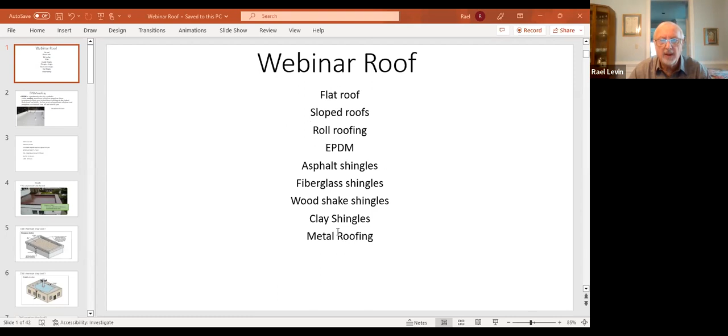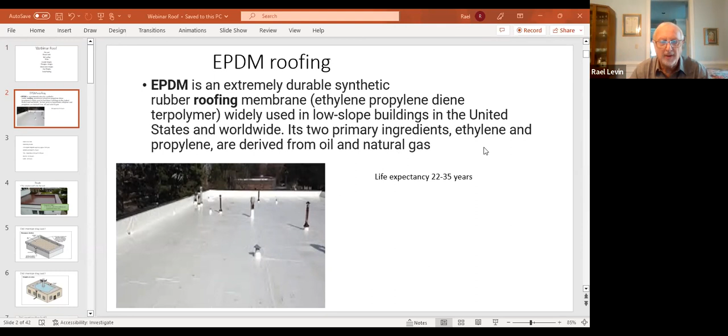EPDM. Its fancy name is ethylene propylene diene monomer. It's used on low slope buildings in the United States and worldwide, more of a commercial application, and it's made out of oil and natural gas. So we need that as well.

EPDM lasts for about 22 to 35 years. Roll roofing, which is probably the cheapest type of roofing, has a 10-year life expectancy. Our standard 3-tab asphalt shingle, about 10 to 15 years. And then, of course, we have architectural shingles that have a little better look to them, a little thicker shingle, life expectancy 15 to 20 years. Slate, all different types of slate, depending on the thickness, 75 to 200 years. Clay tile at about 50 to 100, and metal roofs 40 to 70 years.

I used to love to see 'building off the grid' videos where folks build these homes with little sloped roofs up in Alaska, Colorado, all the really cold areas that get a lot of snow. Metal roofs work really well there. The issue is that with slate, clay, or metal, we can't really get onto those roofs to crawl or walk around on them without special equipment. The same goes really for wood shake shingle roofs as well.

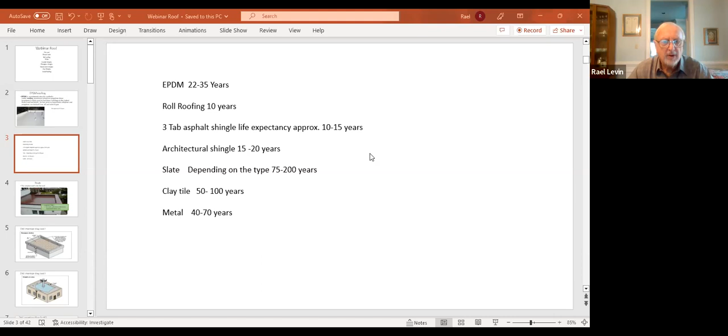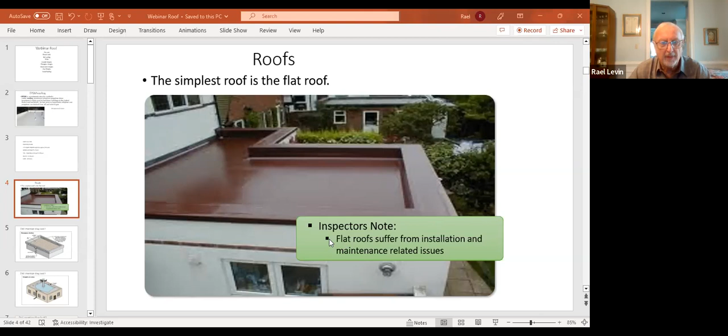So what I'm talking about are the scupper drains. We see the flat roof here, it's got a little bit of a slope to it, and it's got gravel on top. The whole idea is we got to let the gravel slope toward the scuppers and toward the parapet wall, and the water runs out there down to the ground level. The biggest enemy of any roof at all is going to be water, and of course we get rain, so water is an issue. So what we need to do is make sure we always keep our roofs clean and free of debris, free of leaves, etc., in order for everything to function the way it should.

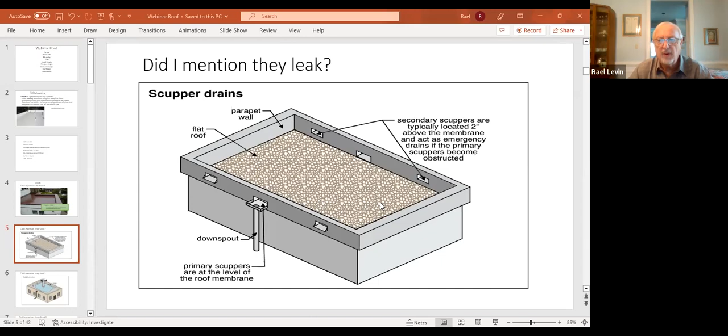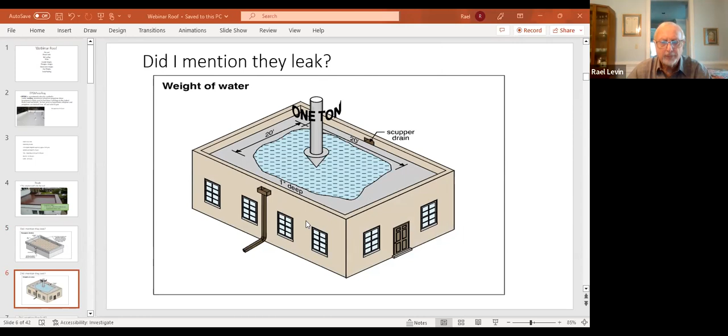So let's look at this flat roof right here, a 20-foot by 20-foot roof area. I'm just going to switch up here to the bigger picture. Okay, so we're looking at 20 feet by 20 feet, a 400 square foot building here. When we get rain on it and there's no way for the rain to drain off, you're dealing with 1 inch deep of water sitting on that roof, and there's 1 ton of weight sitting on that structure.

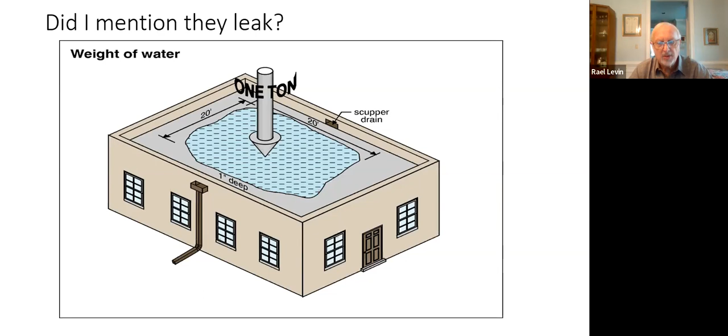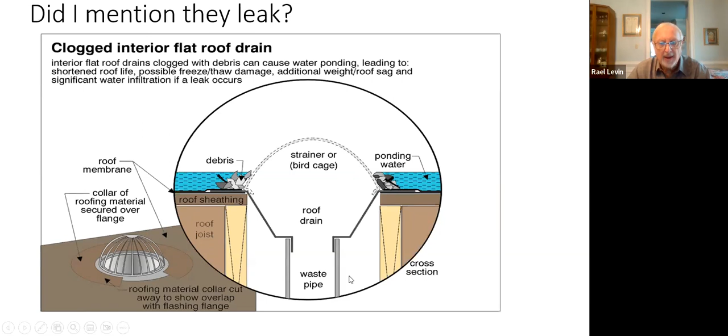What actually happens is when that weight sits on the structure like that, it causes the structure underneath to sag. So how do we handle that? Well, you can see here how debris, leaves, or trash could actually be up on that roof, and we call it ponding when the water just sits there. You see there's a bird cage strainer right here, and it has to be kept clear so the water can run into that drain and away. Then we see here what actually happens is that sag, due to the weight on that roof, causes that sag in the structure. To think about what we're going to do here to alleviate this, well, there would be 2 ways to improve the flow of water off of that roof.

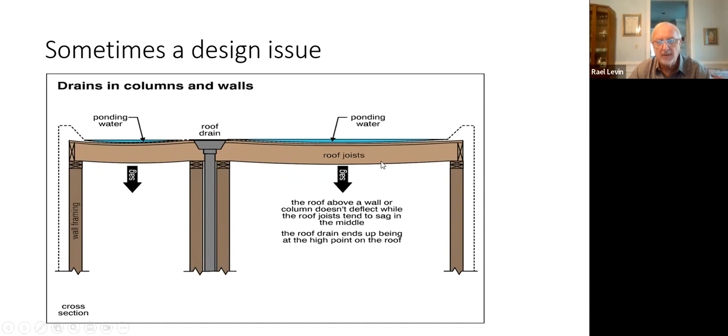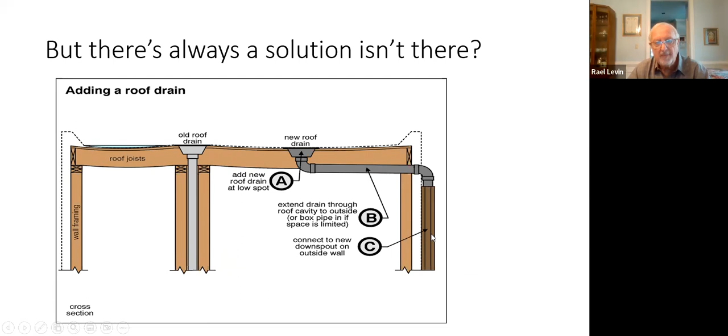One option would be to literally tear out the structure and rebuild it, or go to a new roof drain at a lower point. You can see the sag is in here. They've added a new roof drain. The same would be done on the opposite side here, and then they would take out the drainage above the ceiling level on out to the exterior walls and away.

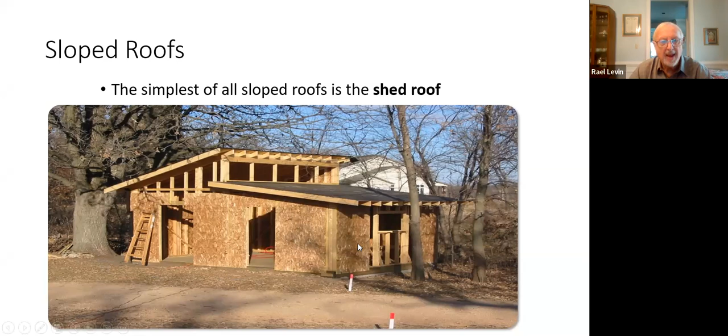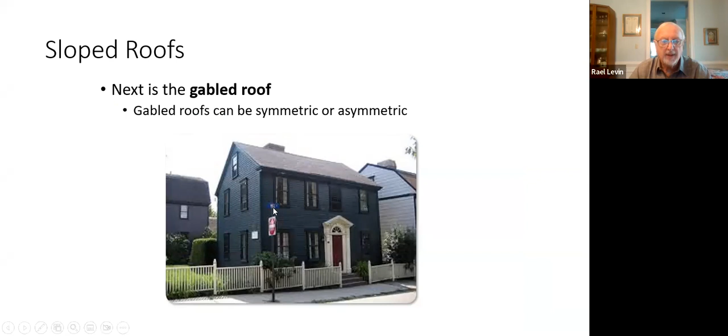We're looking at modified bitumen roofing here. This is our roll roofing type product where you use heat from a torch with a flame on it, and it's heated up on the edges so that it seals down below. Then the top would be covered either with a liquid coating perhaps, or a foil surface, and they would put on gravel as well, sloping it from high to low so the rain could run off that roof.

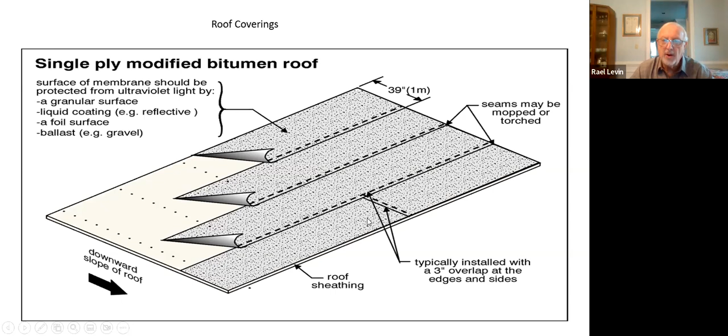So you see the roll roofing here. There's always a little bit of an overlap, a couple of three inches over each seam, so that when it seals down, it's not right at the edge where water could travel back underneath it.

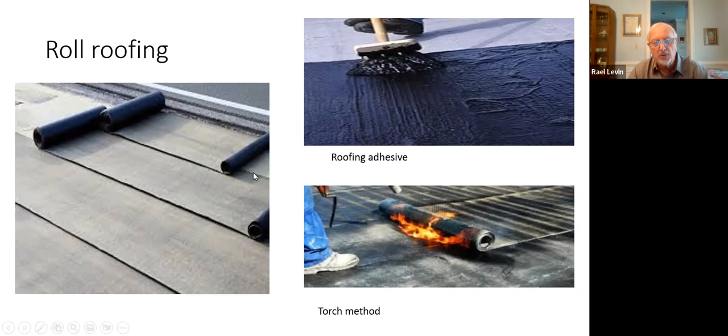Here is a pretty standard asphalt shingle composition. We have our granules on top here, we have the base material, which is going to be fiberglass mat or organic felt, and then the actual body or coating of it, and we have that self-sealing strip.

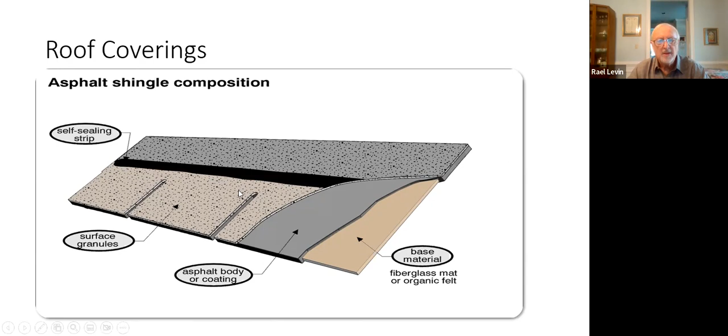When this roofing is brought out to the building site, there's a little attachment here that's very thin plastic. It's just kind of ripped off. The reason it's done like that is because you don't want the shingles sticking to each other while they're sitting out in the yard. So they have that little protection right there, and it gets pulled off right before installation.

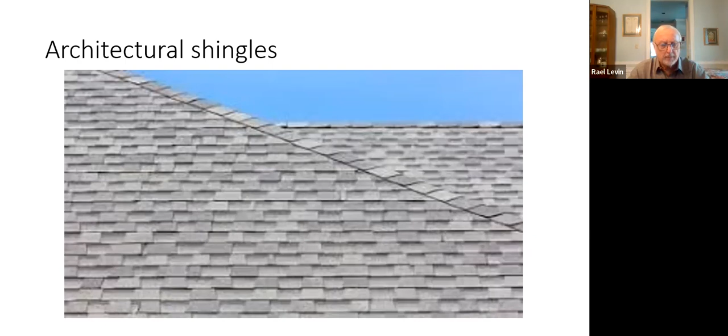Architectural shingles is what we're looking at here. It gives a nicer look to the roof, perhaps a more expensive look on the home, and this is a product that's got a lot of popularity. So when you have a great looking product, there's always going to be somebody coming along to try to copy it.

So what Atlas Chalet shingles turned out to try to look like were the original shingles that we see back here, which is the architectural. But you can see these turned out to be defective shingles. You can see the blisters on these, which is an indication of the deterioration of the shingle, as well as cracking. We're always looking for this, even on new construction, as well as shingles that are a few years old. This was going to probably run into an issue as a defective product, which eventually the manufacturers didn't step up and replace, would have probably gone to a class action lawsuit, just like some other products like Louisiana Pacific Siding and polybutylene did years ago.

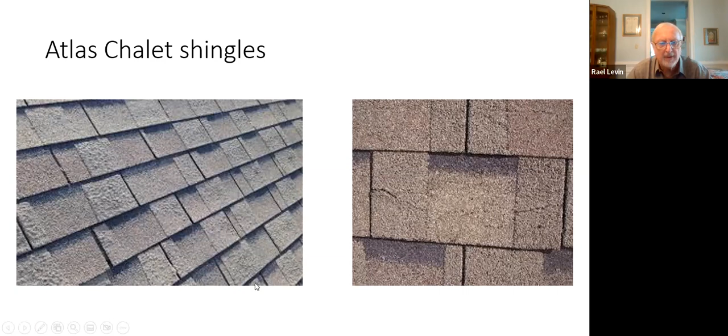These folks actually said they'll replace the shingles, but unless there was some real pressure brought to bear, the shingles would be provided, but the labor would have to be paid for by the owner of the property. So it became a bit of a litigious issue here.

Looking at wood shingles and shakes, depending on the thickness, it would depend on the cost of these shingles. Again, you couldn't walk on them, but they do require maintenance, some type of a water sealer or a sealant of some type to be applied.

Again, it's not a homeowner project. You want to get a qualified roofing contractor that deals with this type of shingle to do the maintenance needed, with scaffolding, because walking on it is extremely slippery, so you could get hurt trying to walk on it. Also, with weight being put on these shingles after they started to dry out a bit, it would cause them to crack and break, and they also curl once they dry out.

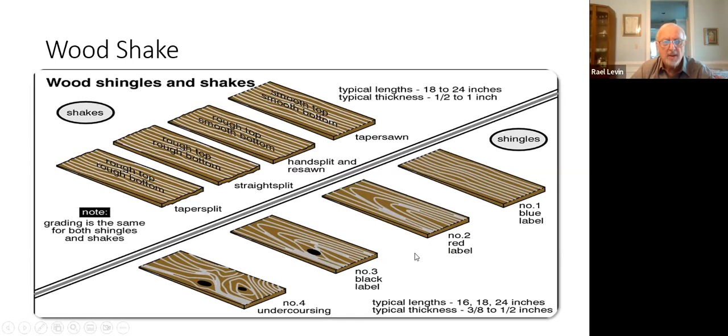So there are lots of maintenance issues with wood shake shingles. And then we're dealing with slate.

Again, you can't walk on it because it is brittle, but you can see here the thicknesses and the different types of life expectancies: 35 to 75 years on Pennsylvania slate, 100 years on Vermont slate, and about 175 on Buckingham slate in Virginia. So, different types of slate, and again, maintenance is important.

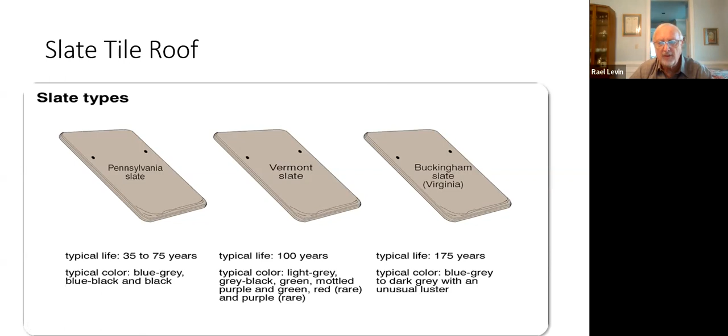We have other methods of identifying issues here. Certainly the first look would be in the attic space to see if there was any water penetration and staining there, as well as other methods we'll get into in just a moment.

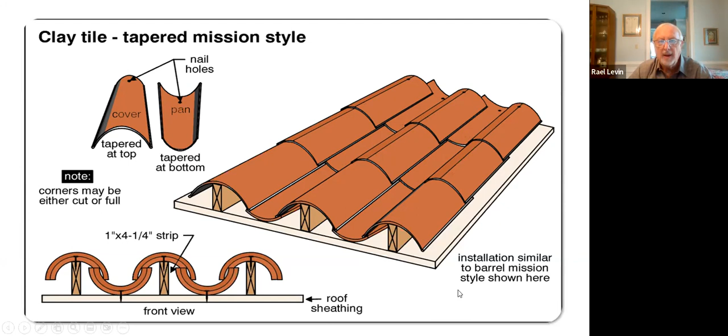And then, of course, we have the clay tile. This is pretty common in older neighborhoods. In the Atlanta area, not too much new construction uses this type of tile. Certainly not in a subdivision, but perhaps a single built home might still have some of this. Again, can't walk on it to look for maintenance issues.

And then there's sheet metal roofing, which also comes corrugated. There are actually some subdivisions that have been built with that farm type look, with metal roofs installed. Super nice looking area - there's some up in the Roswell, Georgia area that I've seen, and they look very nice up there.

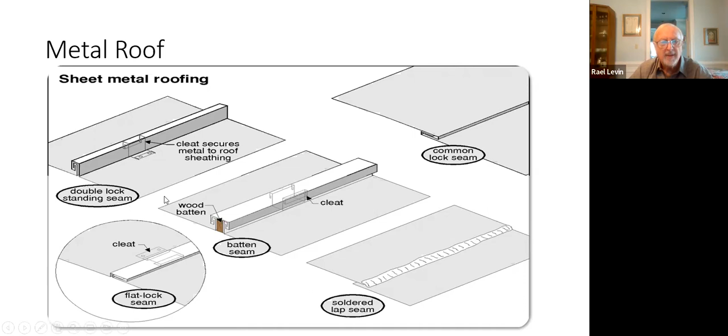And again, just showing here how they actually are held together - obviously not nailed like asphalt shingles are through the shingle, but with cleats and cleat closures and seams, etc.

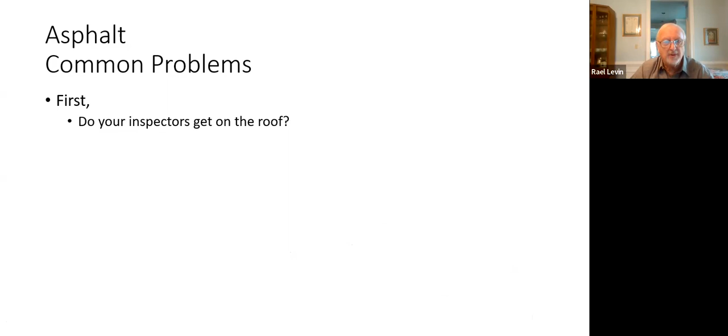Okay, so the question is, well, do your inspectors get on the roof? Inspectors do perform inspections to ASHI standards. So if we can, we will - that's the goal. But there are other methods to provide information about the roof that we do share with you in just a moment.

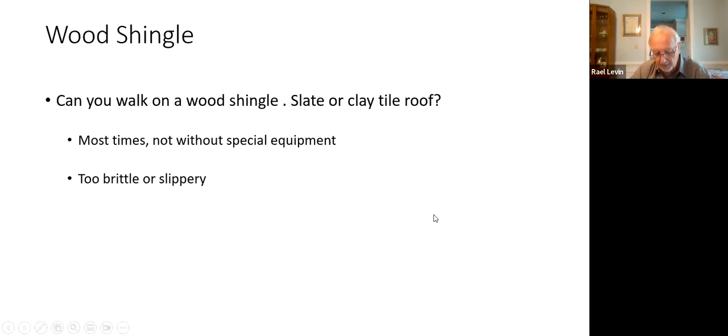So, can you walk on the wood, slate, or clay roof? We've said no, and that's pretty much it - not without special equipment, because it is too brittle and slippery.

So we do our inspections to the standards of the American Society of Home Inspectors. Look at the inspection objectives for ASHI: it's to document and establish a minimum standard for home inspections performed by home inspectors who subscribe to the standard, which we do. Home inspections performed using the standards are intended to provide the client with information about the condition of inspected systems and components at the time of the home inspection.

The second part of that is to inspect readily accessible, visually observable installed systems and components listed in the standard. So looking at that first statement - readily accessible - that means if I can get up there with my ladder, then I'm going to go ahead and get up there and walk on it if it's not too steep or slippery. So it's a safety issue - if I feel it's safe, I'm going to get on it.

And then we can provide information also from the ground with binoculars, from the interior as I mentioned in the attic, and another method as well, which I'll share with you in a moment.

So we'll provide a written report using a format and medium selected by us, which states which systems and components were inspected and, in our professional judgment, are not functioning properly, significantly deficient, unsafe, or near the end of their service life.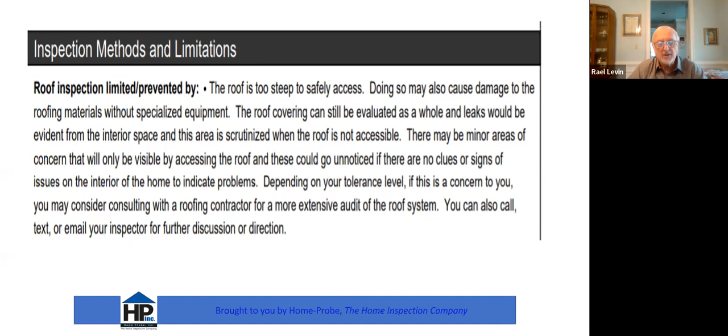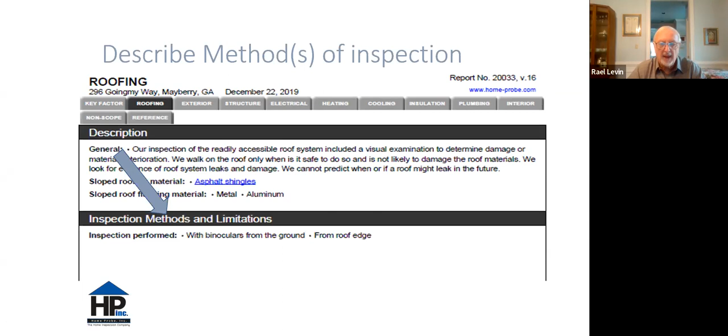You can also call, text, or email an inspector for further discussion or direction. So if we couldn't walk on it, but we'd like to get our hands on it if we can, we might have looked at it with binoculars from the ground, or perhaps got up there with the ladder just to the gutter and were able to put our hands on it, which would be considered the roof edge. But here we're getting with that little ladder and walking across, climbing up there, getting to any area we could actually access. And this one, even though it was a challenge, we would go up there and get onto that roof and actually walk it.

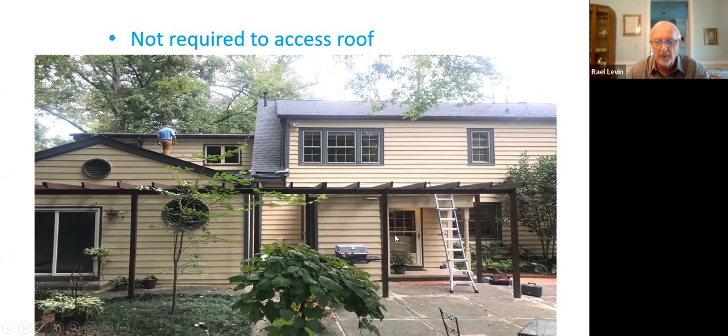On the inside, we'd see the attic, and we'd see that there's been some staining there. As a matter of fact, they even put a little catch pan here to catch any dripping water. So we would see that and be able to report it, and have it repaired perhaps by the seller, or get an adjustment for roofing repair or replacement in the second round of negotiation.

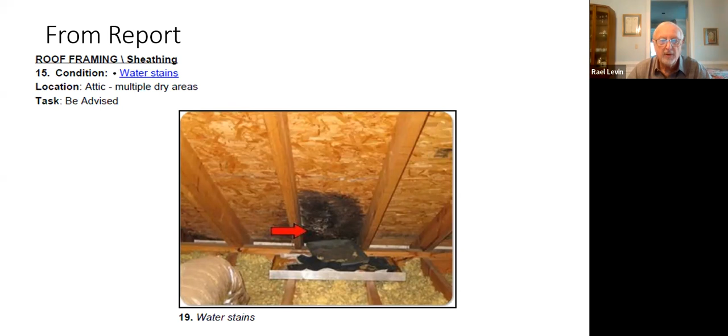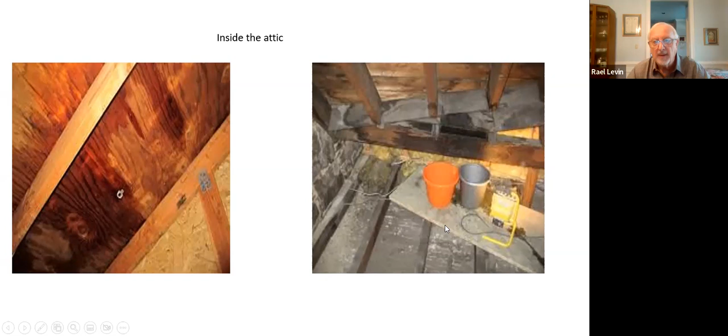You can see right here some more water stains in the attic. We see here a little bit of mold growth actually starting now, and we've got a couple of buckets here to catch the water. So we see those water stains also, and they show up on the ceilings from the roof leaks.

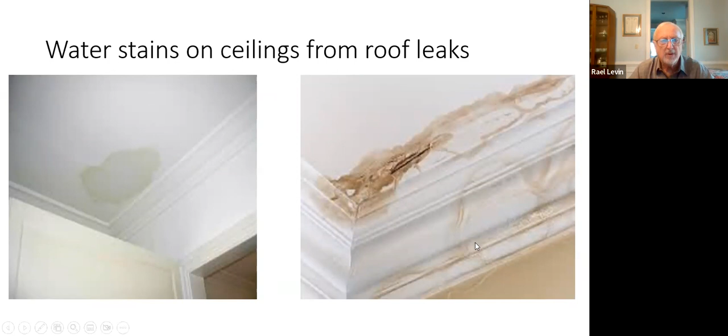We actually provide infrared camera inspection now. We're looking at these things so that we can see if there were leaks, even if they're not really visible to the naked eye. Perhaps there was some painting done, we could use infrared to have a look and see if there were any water stains prior.

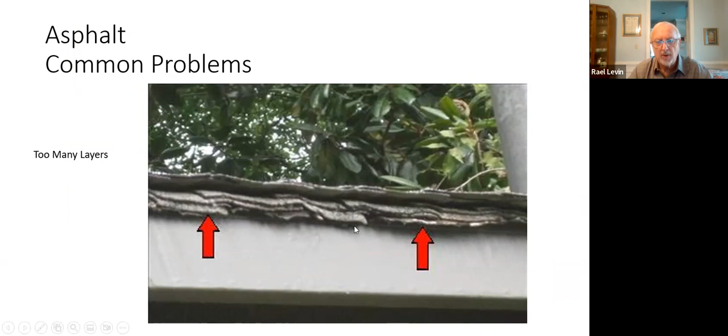Too many layers as well. We're only allowed to have one layer of shingle now on a home. The actual wooden structure underneath was designed to take one layer of shingles, and for many years, multiple layers were installed, which caused roof sagging. Just like we saw in the earlier picture with the water, the same thing goes for the asphalt shingle layers. So we want to have those removed and have just a single layer on there.

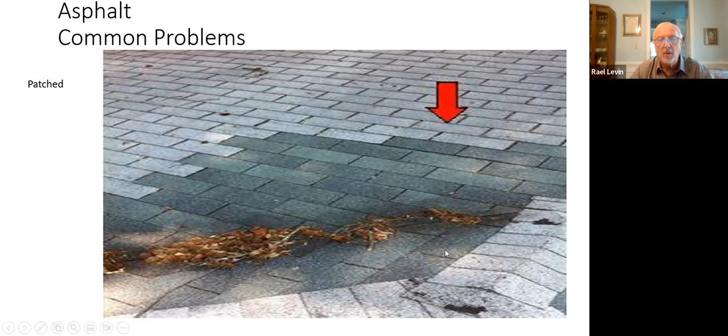Patchwork, we would point that out, and certainly you see the debris in the valley here. We'd be looking inside that attic as well for any signs of moisture, because obviously there'd been a leak and a patch had been done here and repairs made, and perhaps there was no longer a leak. We'd certainly have to ask the seller if that was the case.

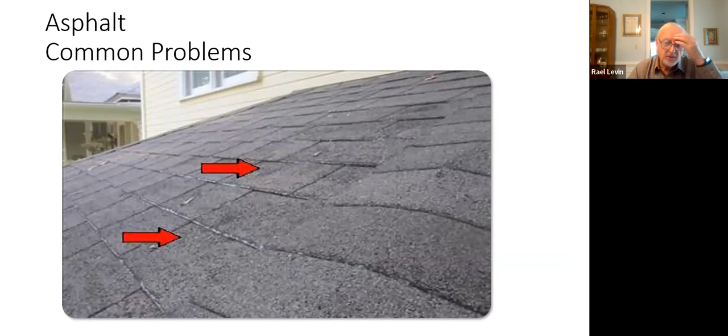Now we see these little white streaks on the edge of the shingle - that is granule loss as well. This roof too is getting towards the end of its life expectancy.

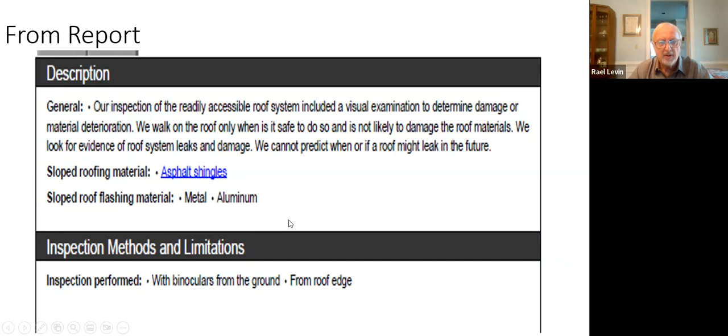So from the report, we said this is asphalt shingle and the flashing material was metal. We did the inspection from binoculars from the ground and from the roof edge, but the other way that we've done now for several years is we use drones to get up onto the top of the roofs we can't get onto. So certainly 3-story homes where we couldn't get up there or even see from the street with the binoculars, we've got our drones, and we get really good pictures from up there.

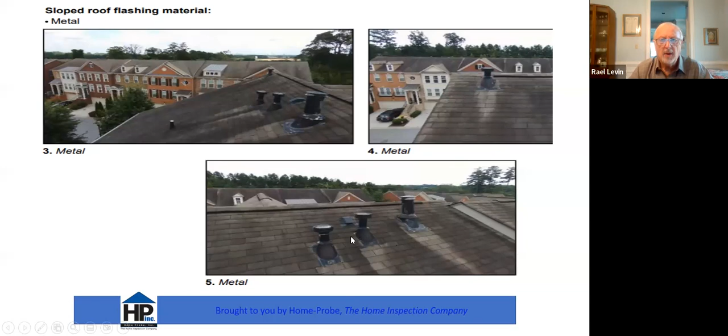You see some drone shots right here. We're looking at the shingles, we're looking at the vents from the heat system and from the hot water heaters, and the plumbing vents like these right here. You can see the splits in them, the rubber gaskets from the plumbing. We can get those by being up there with that drone on the high roofs, and of course when we walk on it as well.

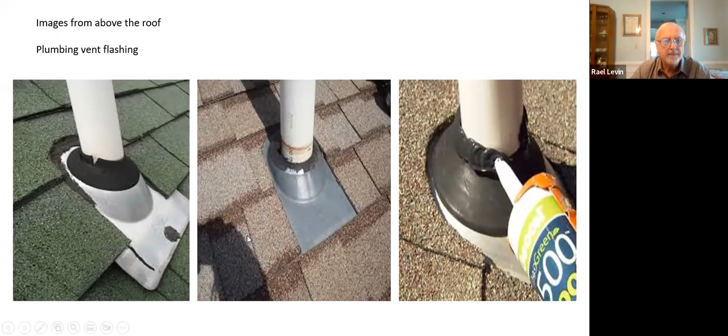All right, so beware of drone hijackers. My drone was hijacked by a bunch of school kids when I was doing some condominiums across the street from a school, and I lost the drone in the forest, but I was able to find it again, and all was good.